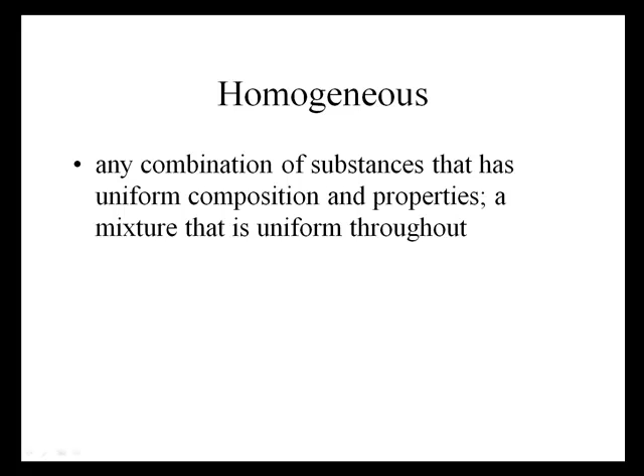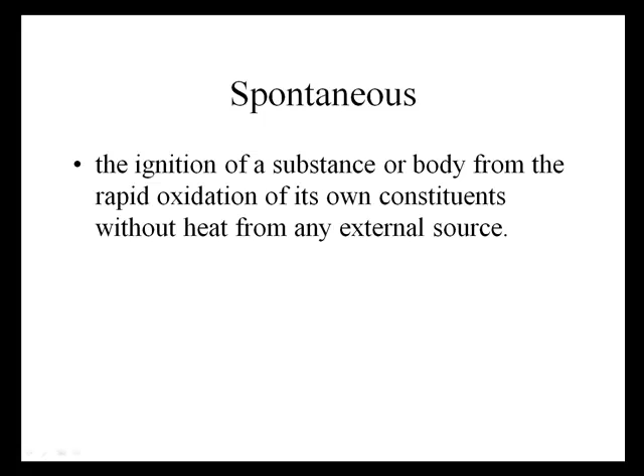Homogeneous charge compression ignition, quite literally, is a uniform mixture of air and fuel that is ignited through means of raising the heat using spontaneous ignition. As of right now, this technology is not yet in production, but is providing many new technology concepts for moving forward towards efficient, low-emission internal combustion engines.

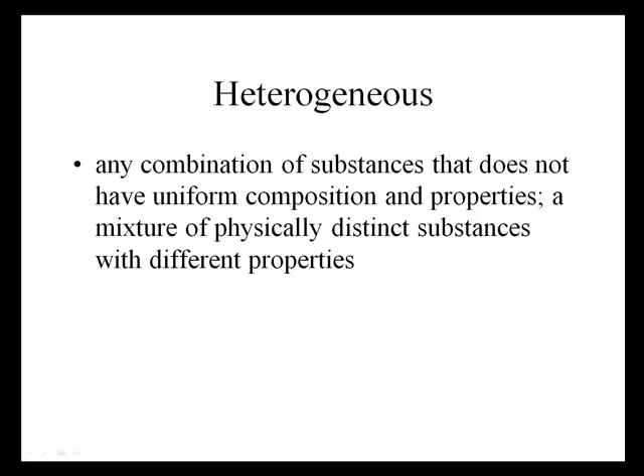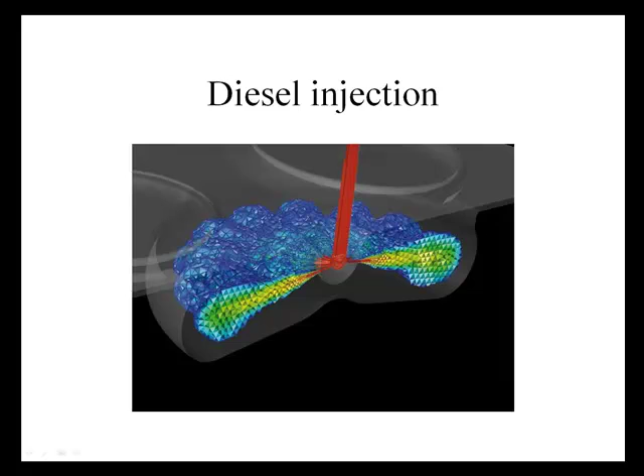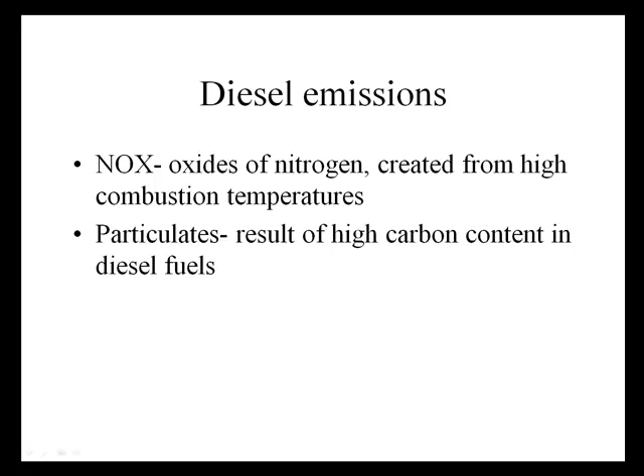Diesel engines have stratified or heterogeneous mixtures. This means throughout the cylinder there is very little mixing of air and fuel. Due to this, diesel engines have very rich areas of combustion and very lean areas of combustion. Because of high heat and high oxygen content, diesel engines tend to burn very efficiently. The fuel type and the high heat create large quantities of particulate matter and oxides of nitrogen, both of which are difficult and expensive to control.

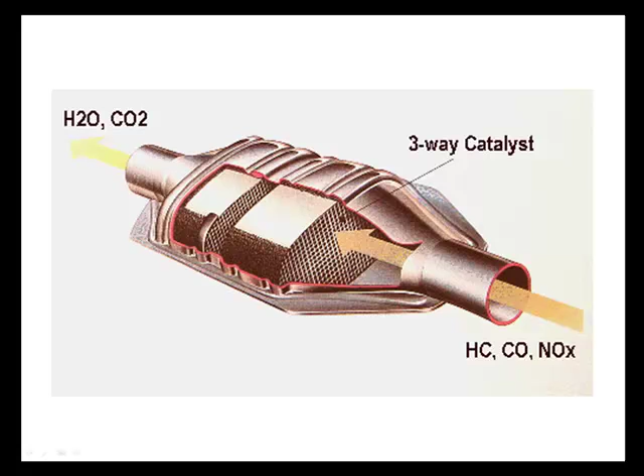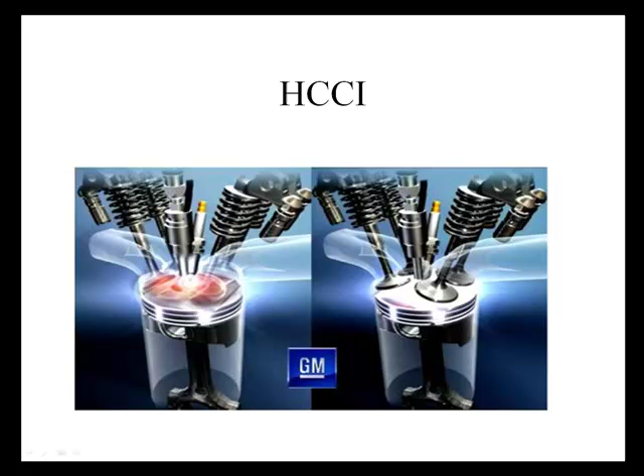Gasoline or spark ignition engines are a homogeneous mixture, meaning that a mixture is consistently mixed throughout. The air-fuel mixture is consistent and can provide relatively stable combustion temperature and relatively low emissions. The byproducts of these emissions are mainly hydrocarbons and carbon monoxide, both of which are relatively easy to control through catalytic converters. The idea of HCCI is to use the best of both worlds, to have the emissions of a gasoline engine and the efficiency of a diesel engine.

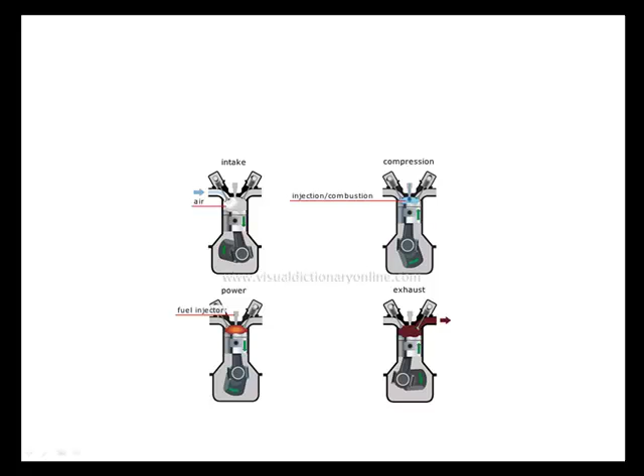Stratified fuel engines are generally compression ignition engines. The basic idea behind these engines is to fill the cylinder with as much air as possible and then compress it to create heat. Once the air has a high enough sensible heat, it can inject the fuel. The fuel entering the compressed air will self-ignite from the high temperature at the outer edges of the fuel spray. As the outer edges of the fuel burn, it will eventually progress through burning all the way through the fuel.

There is generally far more air than needed for combustion. This creates a slow but high heat release. Very little fuel is used to create heat release in these engines. Due to the large quantity of air, the fuel injected gets used in its entirety.

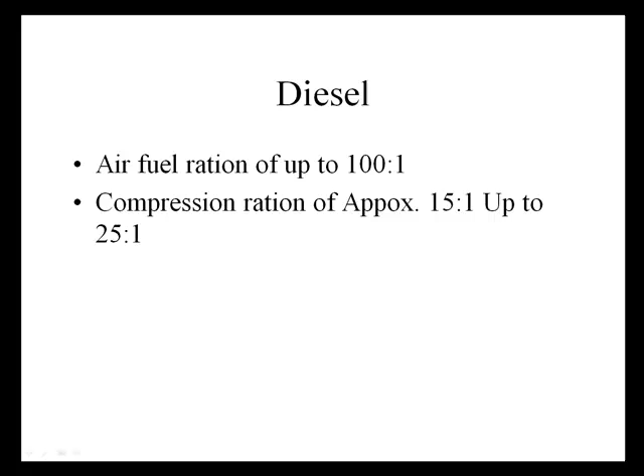Downfalls of this system include the following. The high compression ratios create a lot of resistance to turning the crankshaft. High fuel injector pressures involve having to turn a pump at up around 30,000 psi max, and having expensive injector fuel systems. High combustion chamber temperatures create lots of oxides of nitrogen as well.

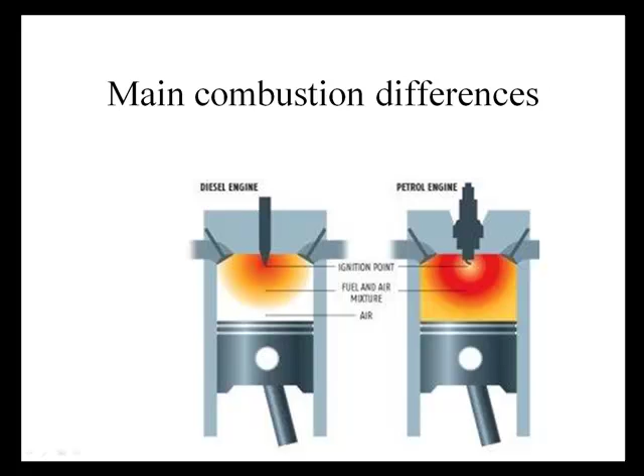Homogeneous mixture engines are typically spark ignition style engines. They have a relatively constant mixture that gets let into the cylinder. The amount of air-fuel mixture let in is dependent on power output requirements. That mixture will be compressed and ignited by way of spark. The mixture will burn from the spark outward in a wave-like pattern. Because of the spark igniting the air-fuel mixture, it is very easy to control the flame timing and the location of the flame front.

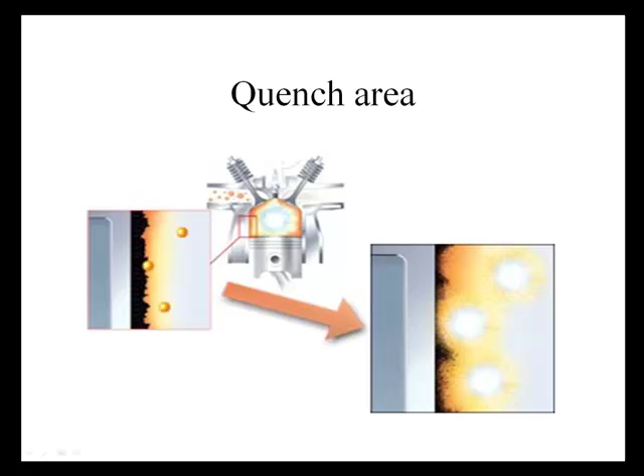The areas of the combustion chamber that are close to the cylinder walls, piston and cylinder head, are considerably cooler and experience poor flame propagation at these locations called quench areas. The hotter the combustion is, the smaller the quench area will be, but the more potential damage that can occur to the engine and mechanical components. These areas are required to protect the items from overheating and melting, but these areas also have unburned and poorly burned fuel.

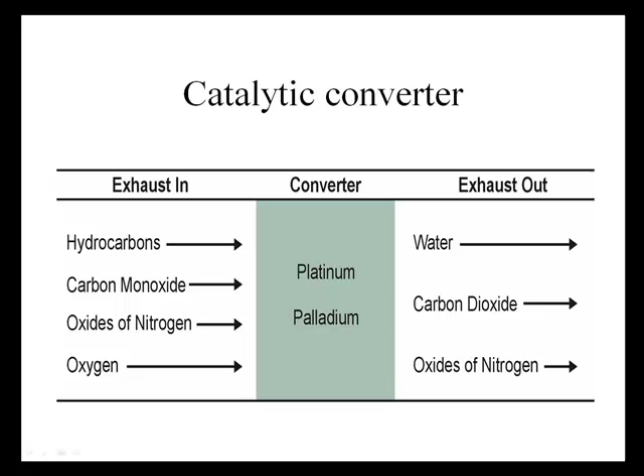Hydrocarbons and carbon monoxide are a result of this. However, a catalytic converter can easily control this. Gasoline engines always run at set air-fuel mixtures close to 14.7 to 1 in order to have proper combustion, which makes it difficult to lower fuel usage and be as efficient as a compression ignition engine.

Homogeneous charge compression ignition advantages and hurdles. The idea of HCCI is to have low particulate and NOx emissions while having low fuel usage. Although homogeneous mixtures will have HC and CO emissions inherently, current technology can easily control them through catalytic converters.

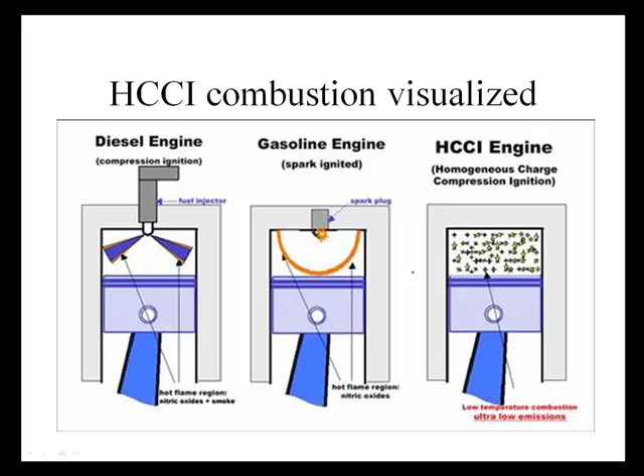Fuel can be burned extremely fast due to spontaneous ignition throughout the mixture. This would also allow the air-fuel mixture to have low fuel content, have a very efficient engine while still having great power output. Also, due to the homogeneous charge and the rapid burn, it would be much cooler than a stratified combustion and even cooler than a traditional spark engine.

This would result in low NOx emissions. Compared to current model gasoline engines, some prototypes are claiming a 15 to 40% increase in fuel efficiency with the same power output.

The main hurdle with homogeneous charge is that in order to reduce or control the engine output, the quantity of the mixture must be limited. If there is less air-fuel mixture entering the combustion chamber, how are we going to get the compression needed to ignite the mixture?

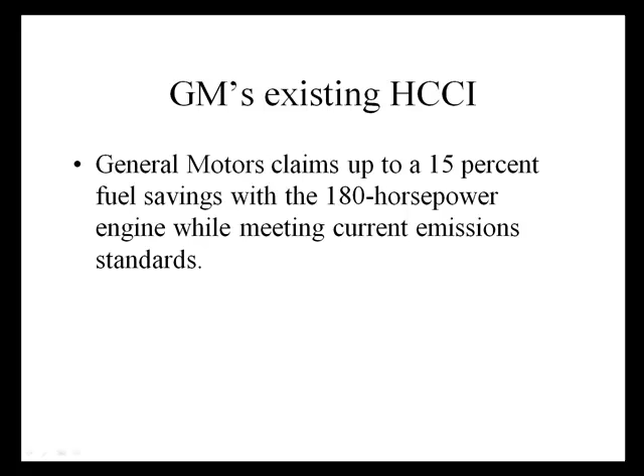This engine will effectively need to create the correct amount of heat needed to cause spontaneous ignition relative to the amount of air-fuel mixture let in.

Some engine strategies to achieve this have been variable compression engines, variable intake control, variable exhaust gas recirculation, and variable valve timing. One interesting fact about HCCI is its compatibility of fuel usage.

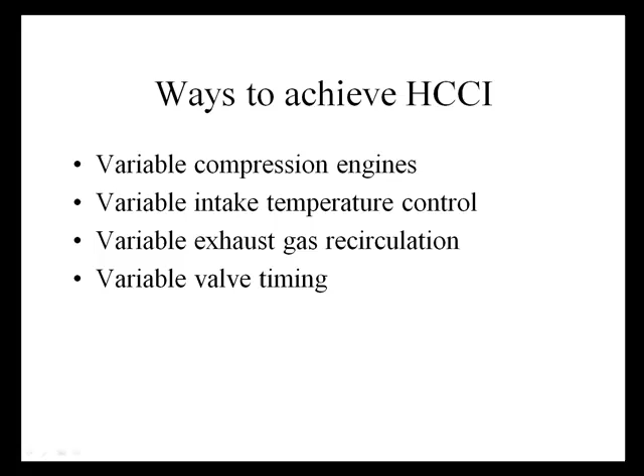Because of the variable nature of the fuel and the variable nature of the engine, combustion can occur as long as it's hydrocarbon. The engine controls simply have to modify the programming to adapt to the present fuel's spontaneous combustion point.

Here are some existing prototypes of HCCI engines. The GM Ecotec, already in the testing phase and having several driving prototypes, has a mild version of the HCCI concept. Although this engine still needs spark plugs for starting when cold and for high power output, it still has the capability of running in HCCI mode during cruise and light to mid-load conditions.

It does all of this with very mild changes to the engine. The main difference is this engine runs an early closing of the exhaust valve. By closing the exhaust valve early, it traps a large quantity of burned gases in the combustion chamber. The exhaust gas heat is then used to raise compression pressures and compression heat in order for spontaneous combustion to occur.

This could occur anytime the engine is running, but not at high power or load conditions. GM claims it works from idle up to 60 miles per hour.

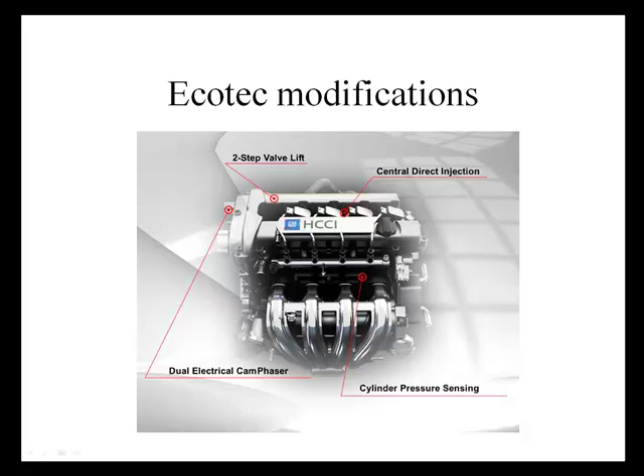Even though this is a very light version of this fuel combustion delivery concept, it is said to increase economy by as much as 15 to 20%. The best thing about this system is that it does not need major changes to the engine design or operation. It should be able to be integrated somewhat easily into many engines and designs that incorporate variable valve timing.

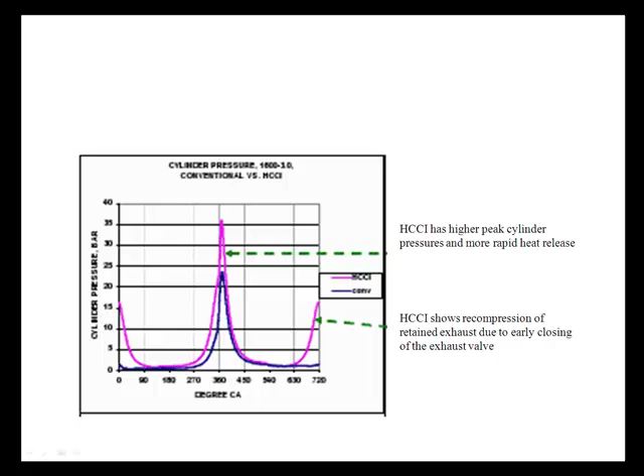When this system switches from spark mode to HCCI mode, it even sounds like a diesel engine. The major reason we have not seen this system yet is they have not been able to control it well enough to have the proper exhaust in the cylinder and the proper fuel mixture as well.

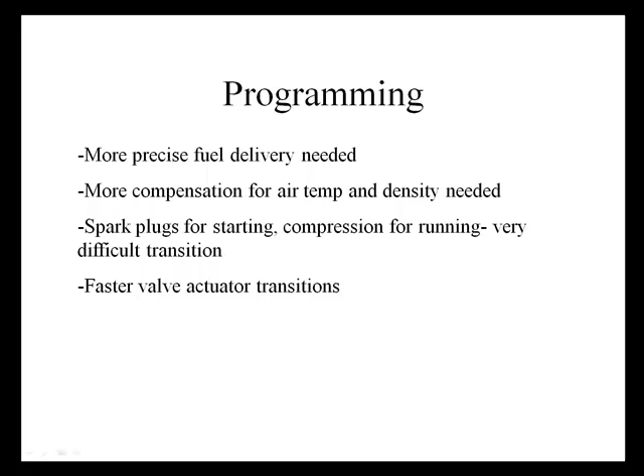It still has poor operation in some climates, very cold and at high altitudes, but when the programmers get their stuff together, it should become available to the general public. This first edition of the HCCI is projected to be released in 2012 from General Motors.

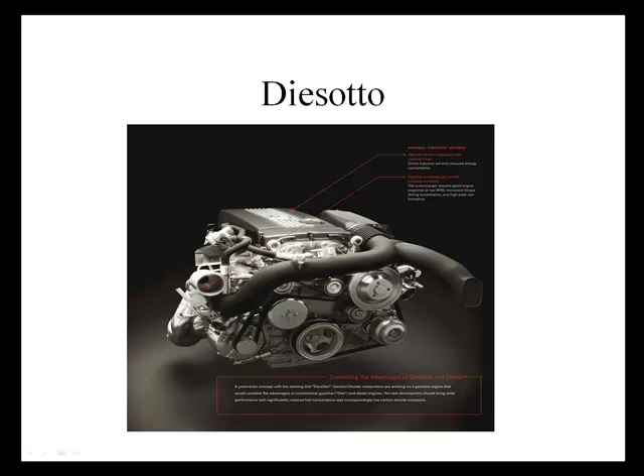Also, Mercedes-Benz has created an engine they called the Diesotto, which I believe is a mixture between diesel and Otto, that operates with very similar properties to the GM Ecotec.

These engines require pressure sensors in the combustion chamber. This new technology is a major step towards more efficient engines. The pressure sensors in each individual chamber can be utilized to adjust individual cylinders for proper output and ultimately perfect engine cylinder balance throughout.

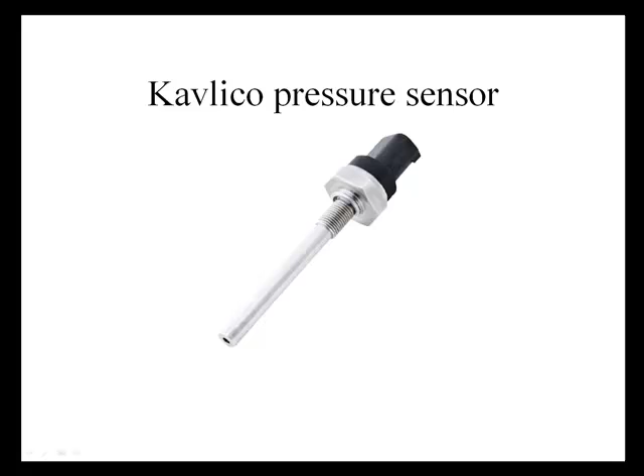In the HCCI engine, it is a required technology in order to achieve the correct pressures for spontaneous combustion.

Although a scissor-like engine block that can change the position of the crankshaft relative to the cylinders seems to be a better control method, it is very weak from an engine block design standpoint and extremely expensive.

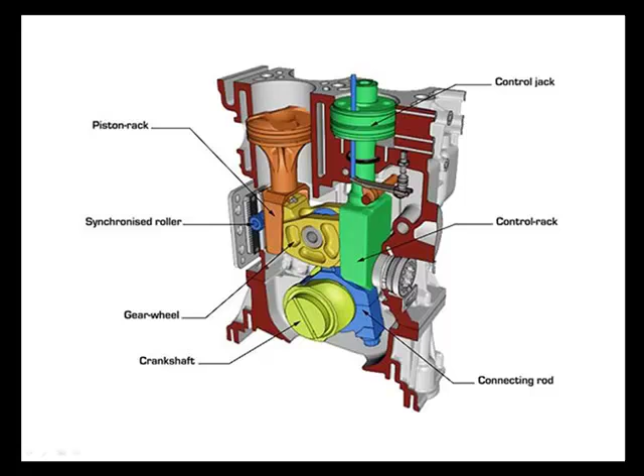As well, fast intake temperature change has been experimented with. It involves combining hot and cold air in variable combinations, and this is also in the beginning phases of HCCI. The variable exhaust closing system seems to be the way most manufacturers are going.

Due to the new fuel economy regulations being put in effect by President Obama, manufacturers have to find a way to produce less CO2, less oxides of nitrogen, and still use existing infrastructure for fuel delivery.

This system seems to be a short-term solution to all of these concepts. Expect to see it coming in the near future.